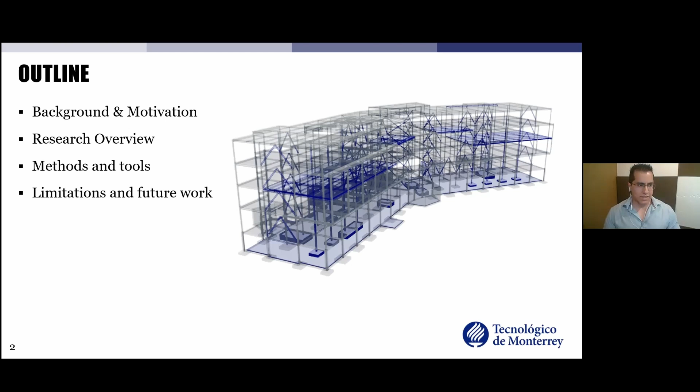In an era of climate change mitigation and adaptation, efficient use of the natural resources is considered as a practical means to increase sustainability in urban settlements. From a life cycle perspective, buildings contribute significantly to the global environmental load caused by human activities. For example, the building industry is responsible for 32% of the world's resource depletion. At the same time, it is responsible for 40% of the waste production to landfills. These numbers reveal a huge inefficiency in the use of the natural resources that are more and more scarce day by day.

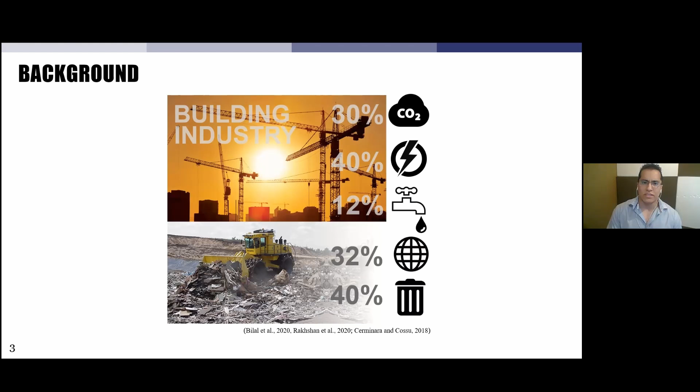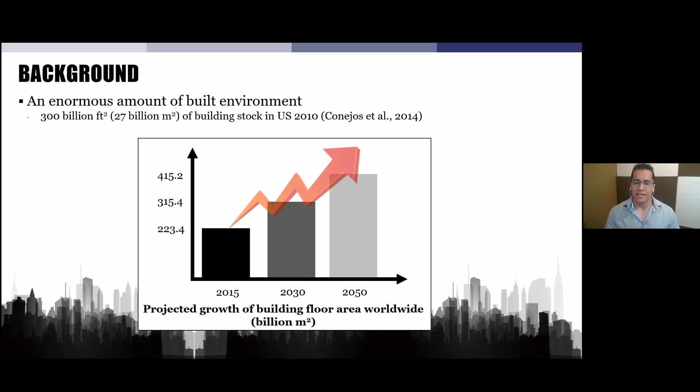Now, a shift of thinking in the perception of sustainability in the construction industry has arisen in the last decade, switching from the traditional creative and innovative approach towards a restorative and regenerative one. This change of perception is founded in the fact that an enormous proportion of extracted materials along human history are in today's built environment, and is going to keep increasing in the coming decades. The turnover rate of the building stock is low. Therefore, we cannot just rely on the new construction of energy efficient assets.

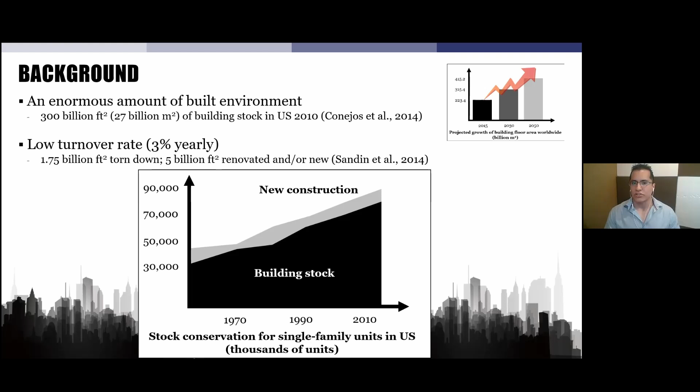The relative importance of the extraction and construction life cycle stages have increased because of the reduction of the energy loads in the operational phase. And finally, the price of materials extraction is increasing, as is the negative environmental impacts due to natural constraints.

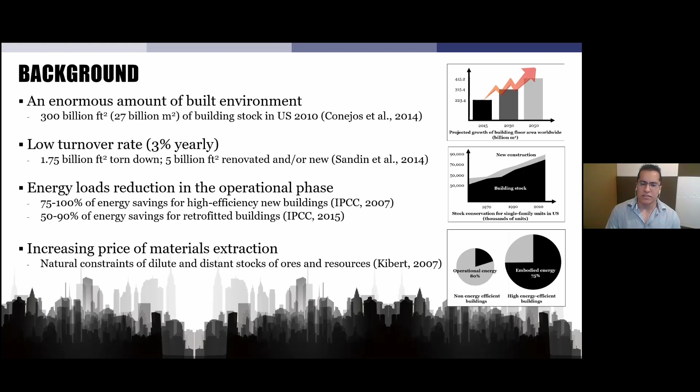To remedy this situation, the construction industry is implementing designs and systems with improved life cycle performance. The main objective is to consider closed loop cycles. The principle of closed loop cycles aims to keep products, components, and materials at their highest utility and value as much as possible in order to create sustainable cycles. One example of these trends is product recovery management, PRM.

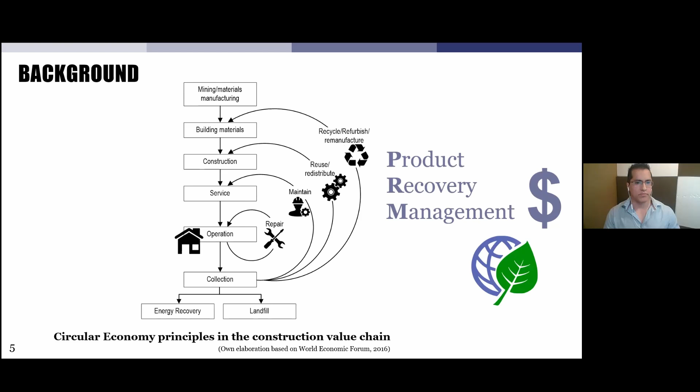In this matter, adaptive reuse of buildings has been identified as a superior alternative in terms of sustainability and circular economy. It involves restoring and in some cases changing the use of existing buildings that are obsolete. Adaptive reuse is considered as a disruptive practice in the current capital project delivery model for the renewal of today's built environment. In a life cycle perspective, adaptive reuse has the potential to maximize the residual utility and value of existing assets by giving them new life through PRM methods, such as selective disassembly and deconstruction planning.

Unfortunately, the current implementation of adaptive reuse relies on conventional intuitive planning procedures by professionals, leading to suboptimal results. This problem is due to the lack of development of PRM methods to assist during the process of adaptive reuse planning. The aim of my research interest is to develop a technical framework for improving the net environmental impacts of new buildings through product recovery management methods and tools.

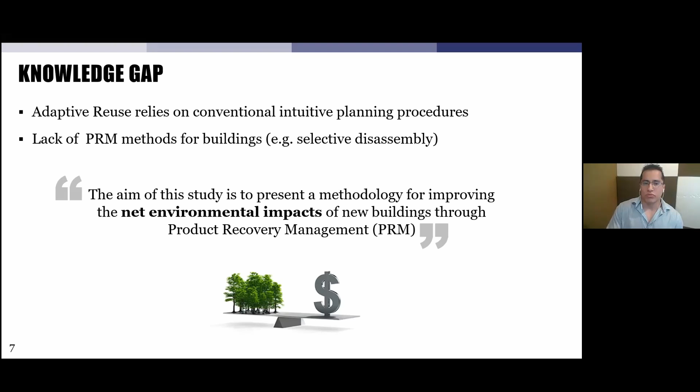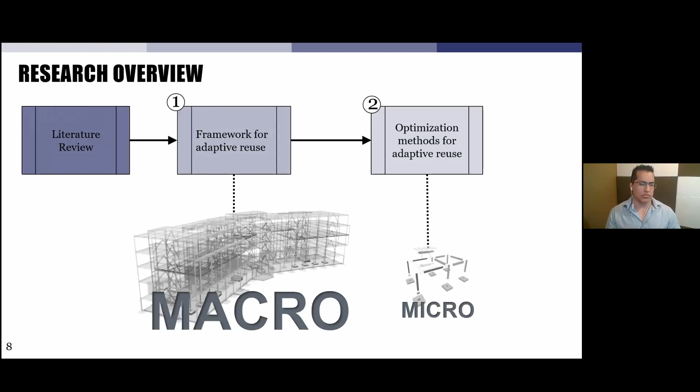In an overview, my research is divided in two main branches. The first one is focused on the analysis of macro structures, such as supply chains for reused components and the role of adaptive reuse inside the circular economy. The second one is focused on the development of optimization methods for adaptive reuse of micro structures. In this presentation, I want to focus on the second branch related to disassembly strategies for adaptive reuse of buildings. The main contributions for this part are the optimization methods related to the process of selective disassembly planning of buildings.

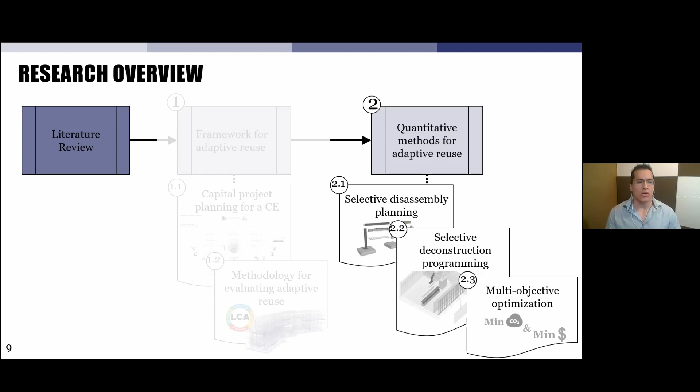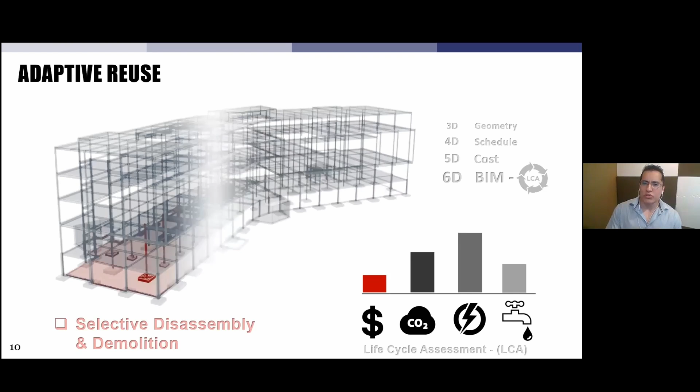Now, in the process of adaptive reuse, it is necessary to take out parts from the old design to refurbish or replace. However, if a threshold is exceeded, adaptive reuse could not produce environmental savings anymore, and it could become more costly than new construction. Therefore, the selective disassembly planning has to be performed efficiently.

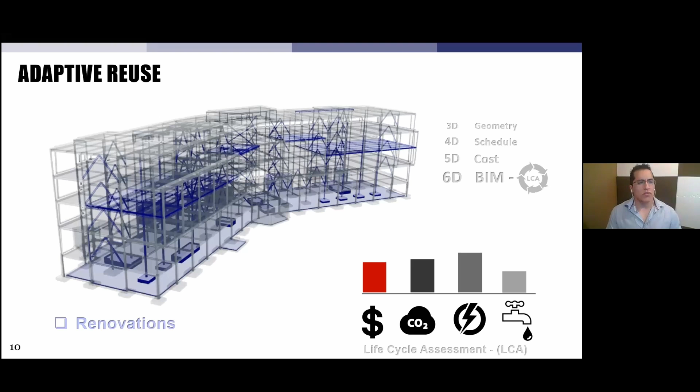In first instance, we developed a disassembly planning approach for buildings. The field of disassembly planning and deconstruction for buildings has been studied for the last 20 years. However, the research has been focused on complete disassembly with fixed activity networks. In contrast, the field of selective disassembly has remained unexplored and underdeveloped.

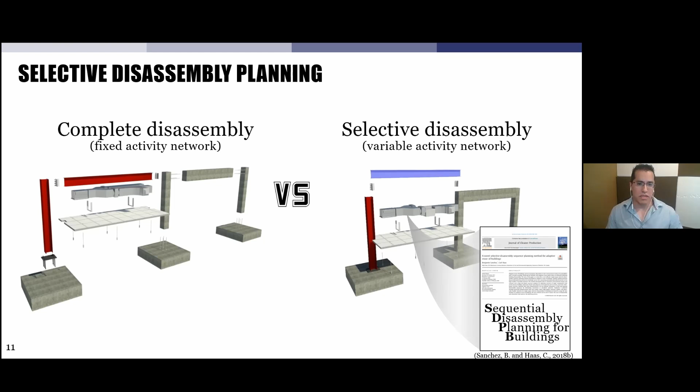In 2018, we developed the first in its class selective disassembly planning for buildings method, or SDPB. The SDPB method is based on heuristic optimization and the disassembly structure graphs theory. The method optimizes disassembly plans for retrieving selective components, for example, the steel beam C7.

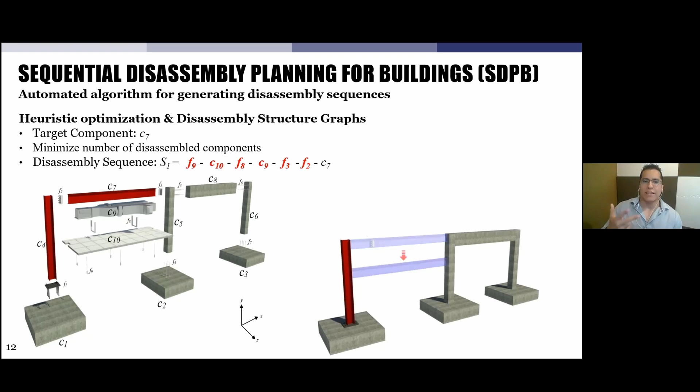The method seeks to minimize the number of disassembled components by using a rule-based recursive analysis based upon physical, environmental, and economic constraints. This method is able to find efficient, practical, and realistic solutions. This has been validated through functional demonstrations with case studies.

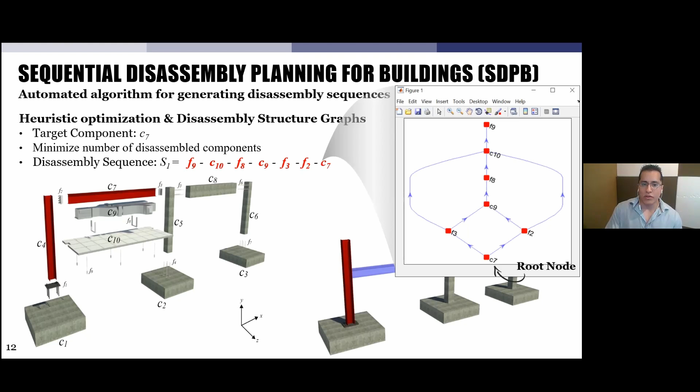Some of the conclusions in this part of the study are: buildings disassembly planning can improve the environmental and economic performance of adaptive reuse projects through appropriate product recovery management. Also, this method represents an advance for improving the technical inefficiencies in renovation projects, making them more affordable.

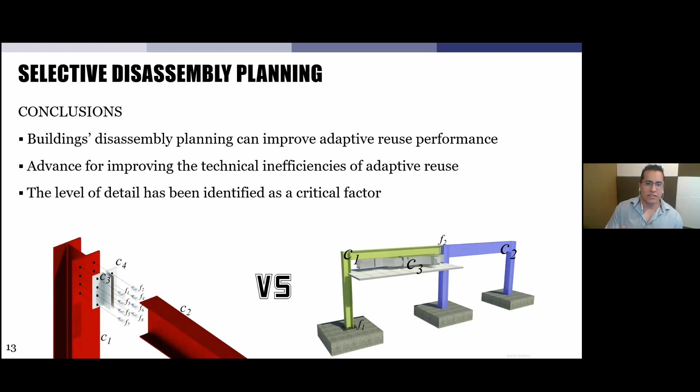Finally, the level of detail of the disassembly model has been identified as a critical factor in order to ensure the feasibility of the proposed methodology. A very detailed modeling could unnecessarily increase the complexity of the optimization analysis.

As an extension of the previous work, we developed a selective deconstruction programming tool. Today's built environment is integrated by recurrent, repetitive building subsystems and modules. In this matter, existing assets with recurrent building subsystems represent a good opportunity to take advantage of the intensive and detailed design process for adaptive reuse, including the selective disassembly planning.

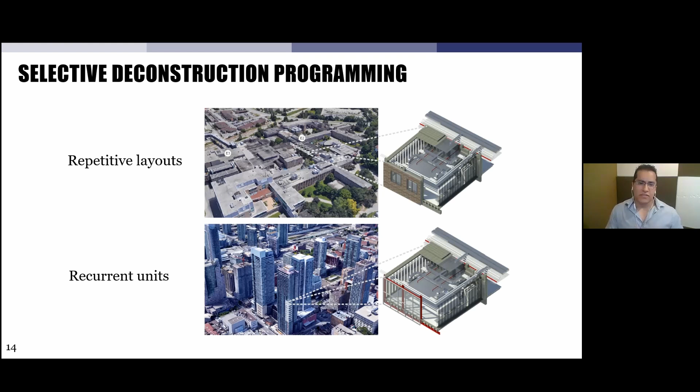Therefore, we developed a tool for selective deconstruction planning and scheduling, and we validated it through a functional demonstration in a case study. In 2017, an entire corridor of rooms located on the second floor of the E2 building was redeveloped as part of an adaptive reuse project at the University of Waterloo.

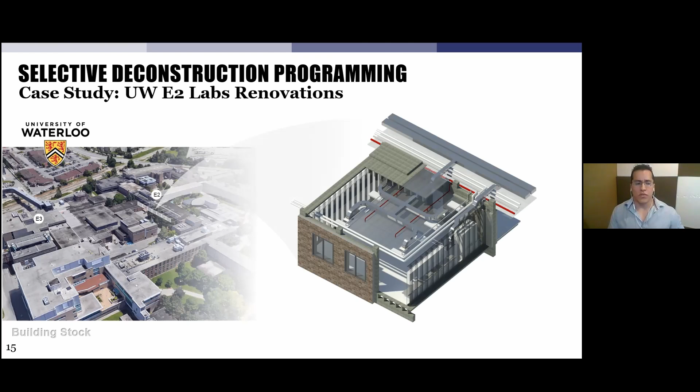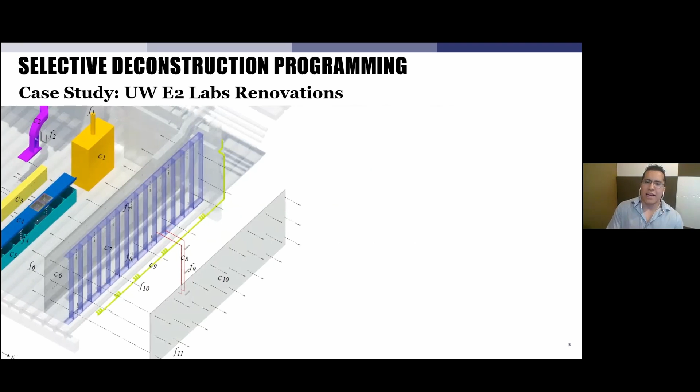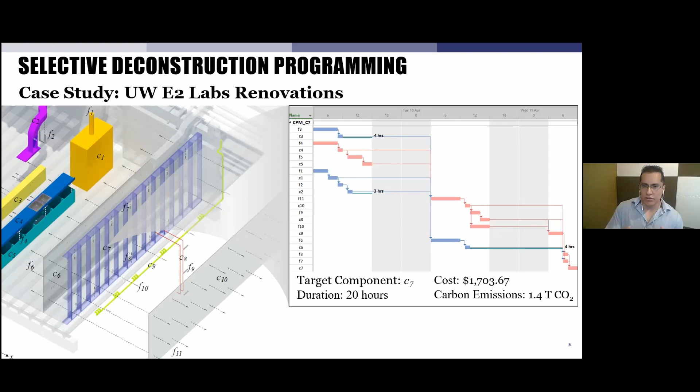Our method is able to analyze specific subsets of the 6D model. The method estimates the deconstruction programming of the works in an automated way by extracting the metadata generated from the SDPB approach. This approach optimizes the disassembly plans for multiple targets and then merges them all into a single deconstruction program. For example, for retrieving the component C7 in the figure, the critical path of the deconstruction program is calculated with the duration, cost, and environmental impacts.

In conclusion, this study develops and validates a pioneer selective deconstruction programming approach. Also, correct deconstruction programming has the potential of improving adaptive reuse performance. And finally, this approach improves the project's performance through process automation.

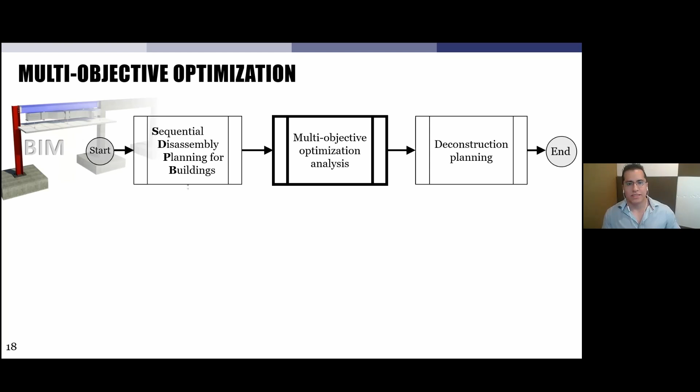In the last stage of our investigations, we developed a multi-objective optimization analysis for selective disassembly. First, the SDPB method is used to generate the disassembly plan for retrieving single or multiple components. Once the disassembly plan is ready, more deconstruction methods per component are included.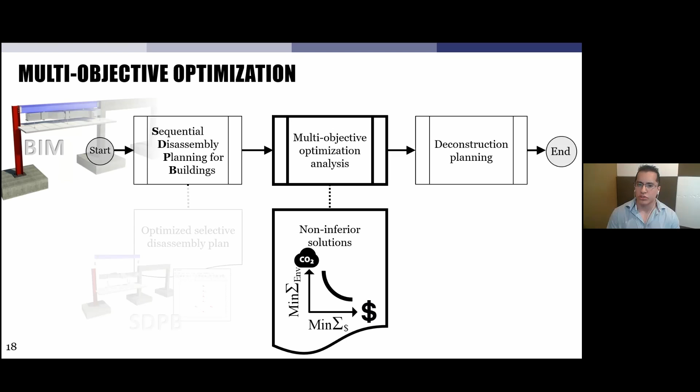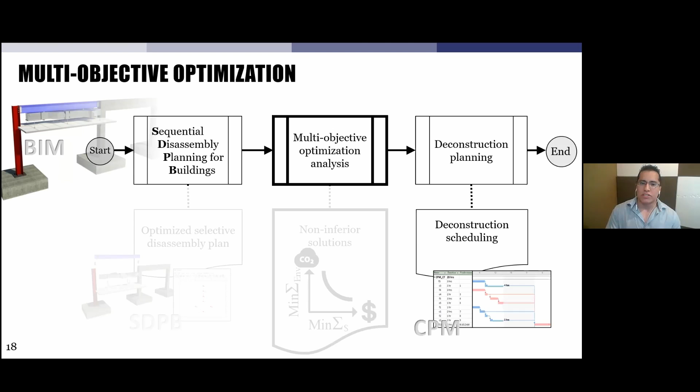Then, a weighted multi-objective optimization is implemented in order to generate the set of non-inferior solutions that minimizes environmental impacts and building cost. After finding the set of non-inferior solutions, the decision makers have the responsibility of choosing the best alternative for the project.

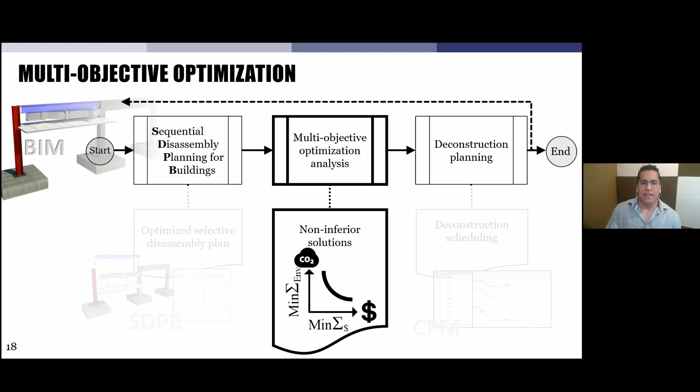As it is shown in the figure, this becomes an iterative process whereby if the project needs are not fulfilled, the adaptive reuse design should be changed by the designers. We developed the BIM archetype as well as the disassembly model of the subassembly displayed in this figure. First, the SDPB method creates the disassembly plan for target components, for example, for retrieving the components C7 and C13.

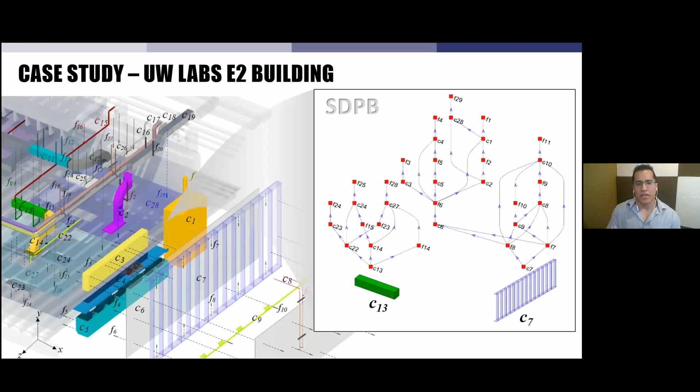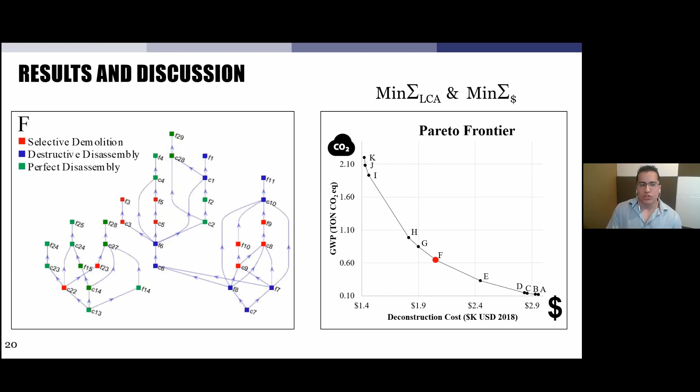In the next step, the multi-objective optimization is performed. The results show that different complete disassembly plans exist for all the possible combinations. The possible combinations are driven by the deconstruction methods per component, as well as the dismantling interdependence. Solution A represents the most eco-friendly alternative because it is the one that reduces the negative environmental loads. In contrast, solution K represents the most cost-effective option.

Now, even though the potential benefits for implementing adaptive reuse, there are several barriers in different domains that limit its current application. The field of barriers to adaptive reuse has been studied and documented in depth due to the importance of the topic.

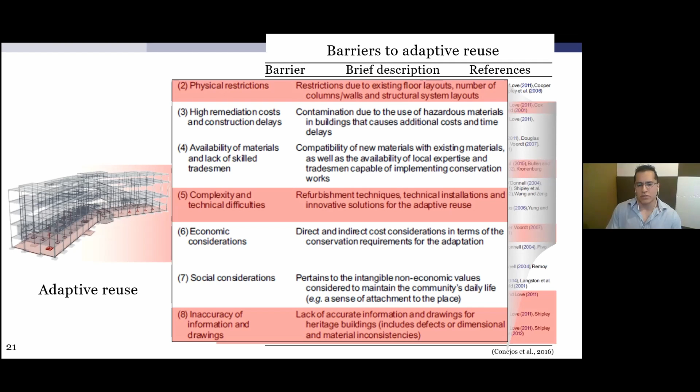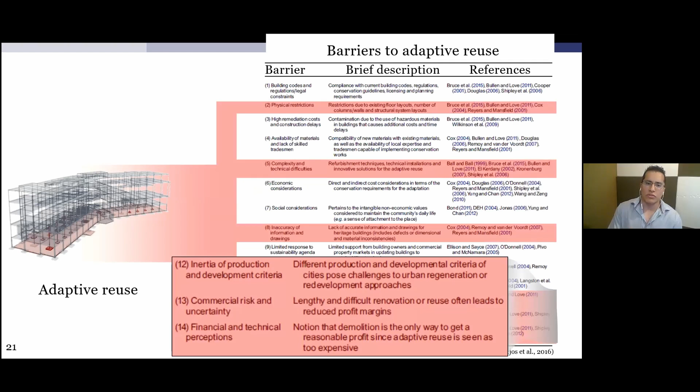The framework and the methods developed in my research aim to tackle some of the technical barriers, such as physical restrictions, technical difficulties, and inaccuracy of information, and even drawings. Also, there are other kinds of barriers related to the resource-based business model, such as the inertia of production, commercial risk, and financial perceptions.

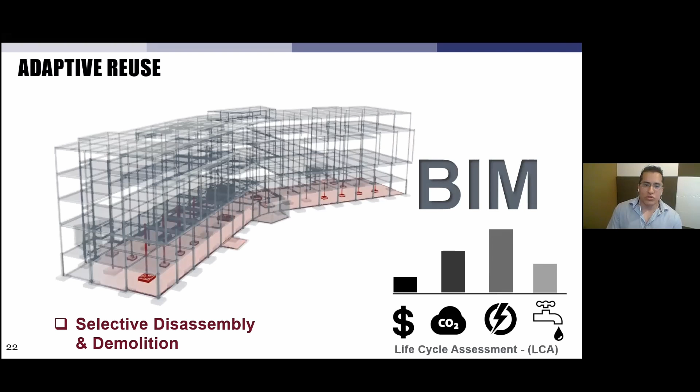In this matter, the use of BIM for adaptive reuse has the potential for optimizing the project outcomes. However, current BIM models do not support important project activities for adaptive reuse, such as disassembly planning, product recovery management, or parametric design to integrate recovered products in a new design.

Therefore, in another study, we developed and integrated a BIM process model for adaptive reuse project execution planning. In this approach, we take advantage of the intelligent 3D model-based processes of BIM for adaptive reuse projects.

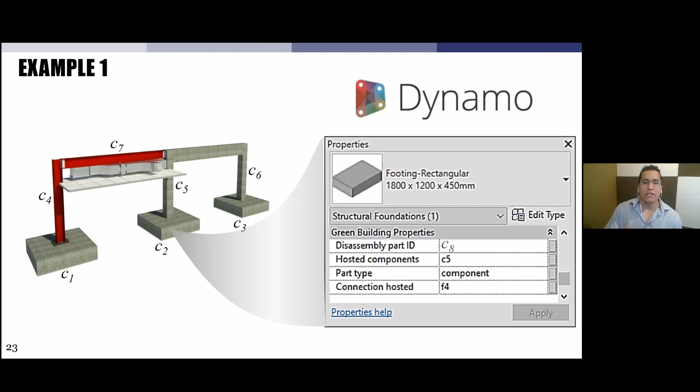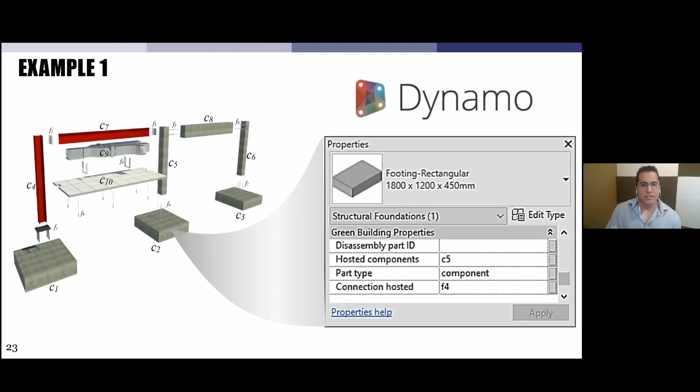And in a first example, we developed an automated script to add meaningful information to the BIM elements during the modeling process. This information is fundamental to compute the disassembly planning of target components, such as type of part, disassembly part ID, and hosted components.

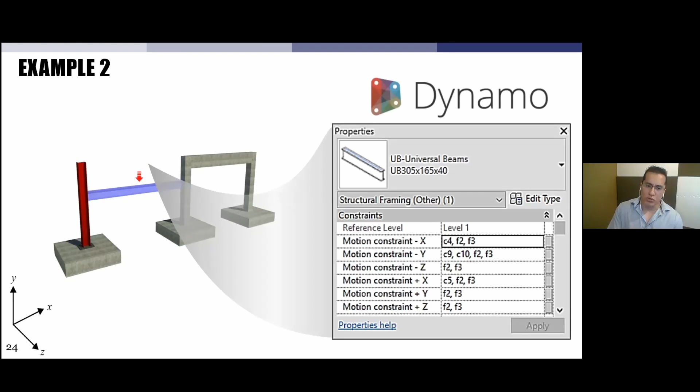For a second example, we developed an automated script in order to extract relevant information from the BIM model for the deconstruction planning. This information is fundamental and necessary for determining the deconstruction sequences of target components to retrieve, such as motion constraints for components and extraction directions for connections.

With the information generated and retrieved from the BIM model, now it is possible to apply methodologies for selective disassembly and deconstruction planning.

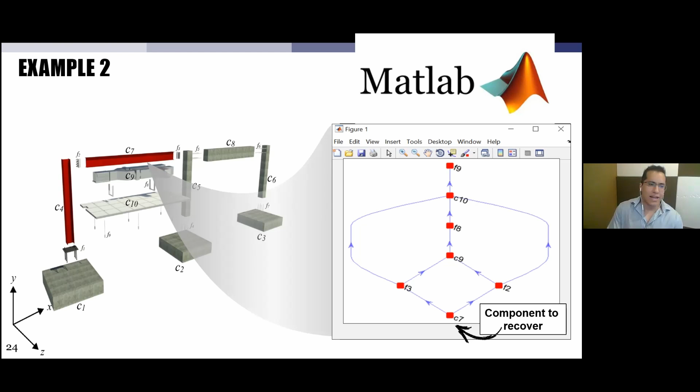One of the main limitations of the methodologies and tools presented is that their accuracy depends on the accuracy of the input data. In this matter, the available data for deconstruction works is very limited to only a few options according to the most common trends in the construction industry. Therefore, we had to make some assumptions for the estimation of some missing data.

Some of the following research stages will be the analysis across the building stock in order to determine the global potential benefits of adaptive reuse or reuse of building components. Also, there is a need for the incorporation of complex deconstruction methods. In addition, there are parallel areas of opportunity to keep developing the methods for improving the dismantling of buildings. For example, selective modular disassembly planning and testing alternative optimization methods.

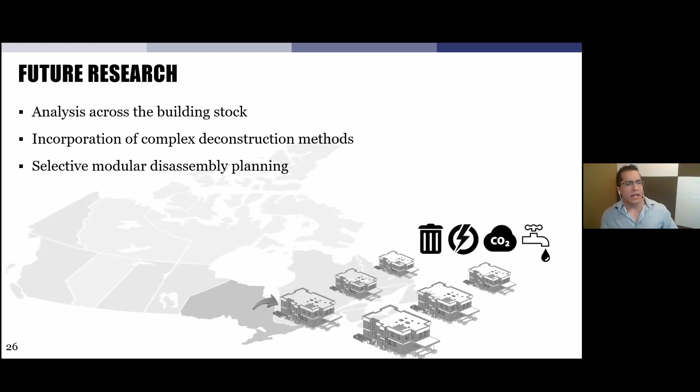Also, some of the alternative applications of the methods presented are designing for future adaptability of buildings. With these methods, it will be possible to create green building designs that are very efficient for the future disassembly or adaptation. Also, it will be possible to develop training tools for deconstruction works by using virtual reality. In addition, there are new business models arising in the field of circular economy for the real estate market, where buildings are designed as the future raw material banks.

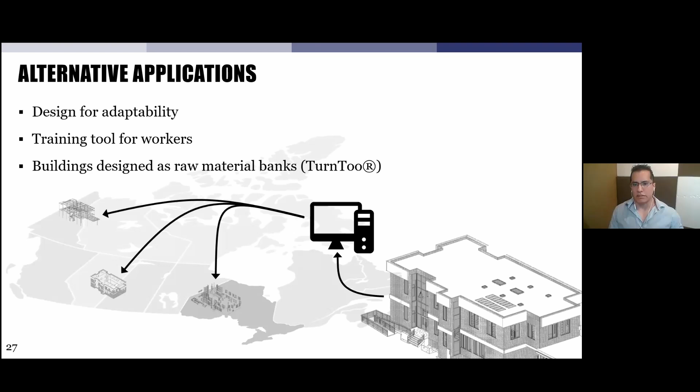In addition, we are living in an era of technological advancements that are making possible the improvement of buildings' performance along all the life cycle and along the entire construction supply chain. For example, it has been demonstrated that digitizing building information is reshaping the ways for delivering buildings.

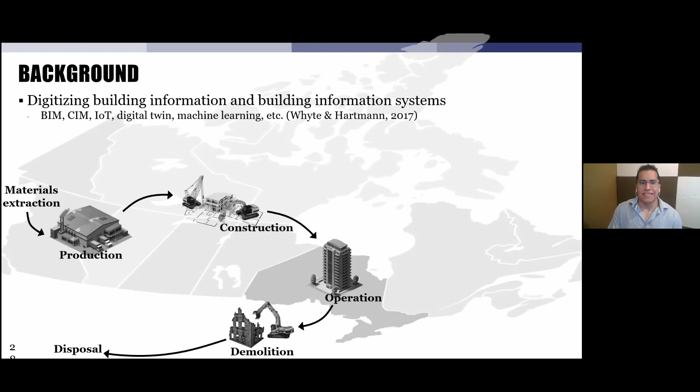Digitizing the built environment is leading to a greater integration across practices and skills that were once considered separately. This integration is helping to create technical solutions and new functional business models in the field of circular economy, with the purpose to move towards a more sustainable environment.

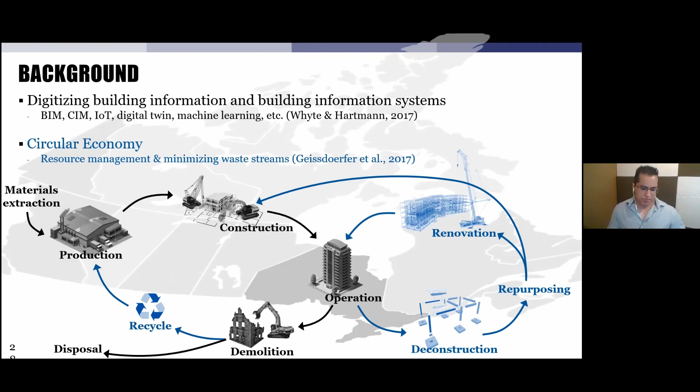And all this research has been developed in collaboration with colleagues from my alma mater, the University of Waterloo in Canada, also the Technological University of Berlin in Germany, and Chalmers University in Sweden. We are pleased that our ideas have been well received, and we believe in the future potential that they have.

And finalizing, I am very committed to the vision and motivation of the presented work, and I will work continuously towards the development of this kind of innovative approaches for sustainability in construction.